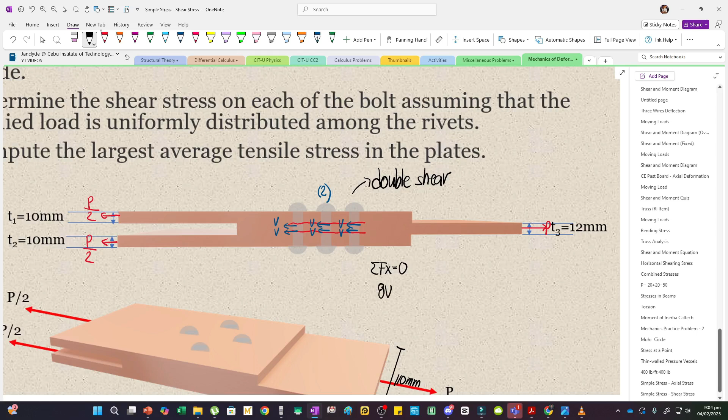Therefore, the shear force is equal to P divided by 8. Computing the shear stress, the diameter of each rivet is 20 mm. So this is now P over 8, our shear force, divided by pi over 4 multiplied by 20 squared. Or essentially, you can just use the force P. In our problem, P is equal to 20 kilonewtons times 1,000, and we have 8 shear areas, so multiply that by 8.

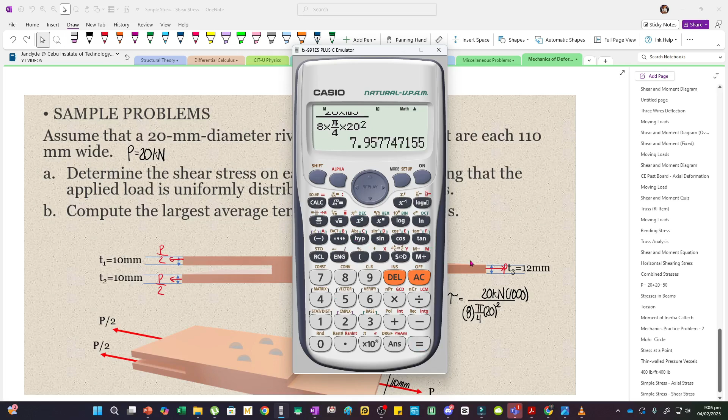Again, you can analyze it as this: the shear force is P over 8, or in essence you have 8 shear areas. So we input that, 20 E3, then divided by 8 times pi over 4 multiplied by 20 squared. So this is 7.96 MPa.

Now what if we remove the bottom plate? If we remove the bottom plate, this will just be subjected to single shear. So this shear area, just multiply it by 4, the number of bolts. Essentially, multiply the shear area by the number of bolts, and then if it's double shear, multiply it again by 2.

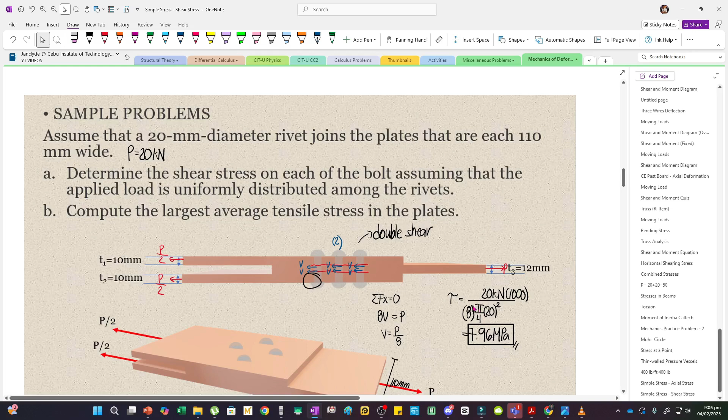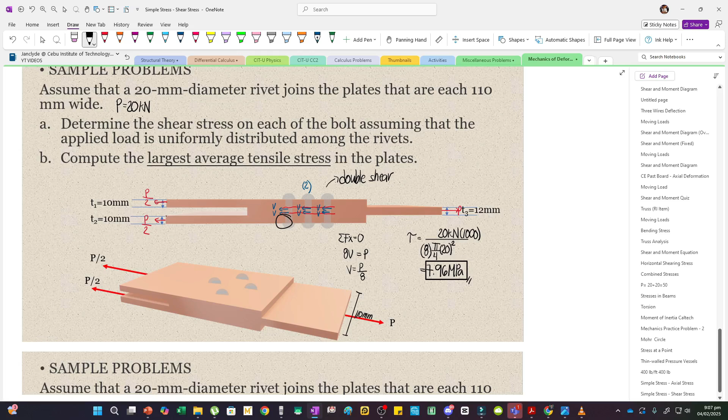Now for the second question, compute the largest average tensile stress in the plates. The plates, the middle plate has a different thickness from the top and bottom plate, so we need separate calculations. However, you should be careful here, what's being asked is the largest average tensile stress. Now, for tensile stress, we need the perpendicular area, perpendicular to the force.

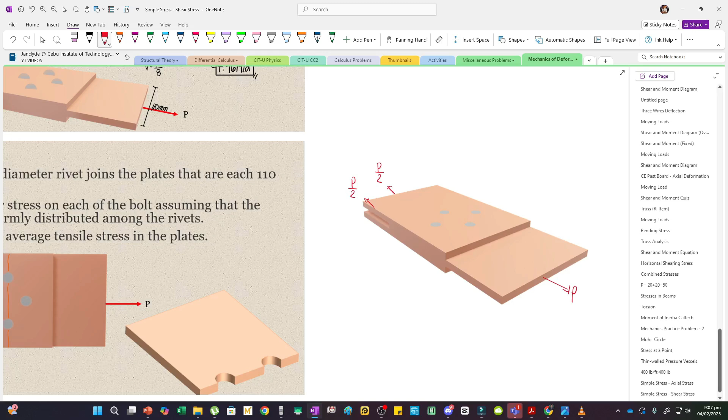So essentially, if this is our plate, this is the force we applied. And here too, you have P over 2 at the bottom. Notice this is the perpendicular area to our force. But the largest average tensile stress will not happen if this is the area we consider, since area is inversely proportional to stress. So as the area gets smaller, the stress gets larger.

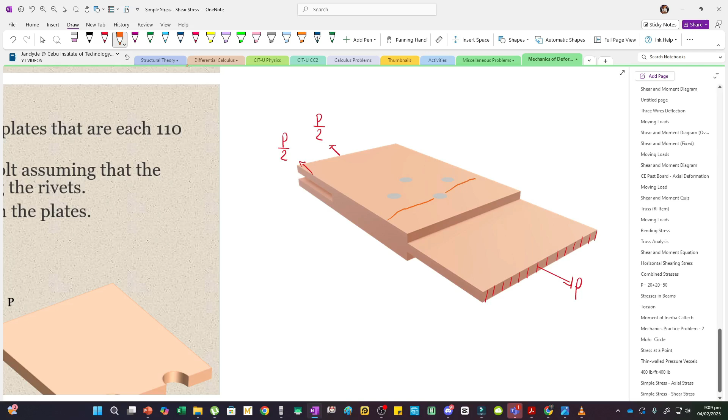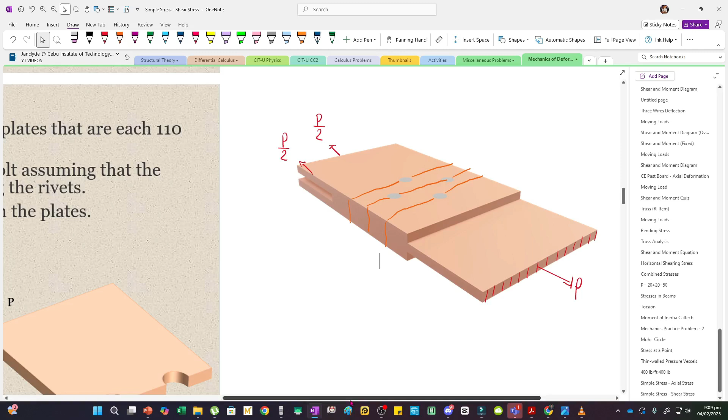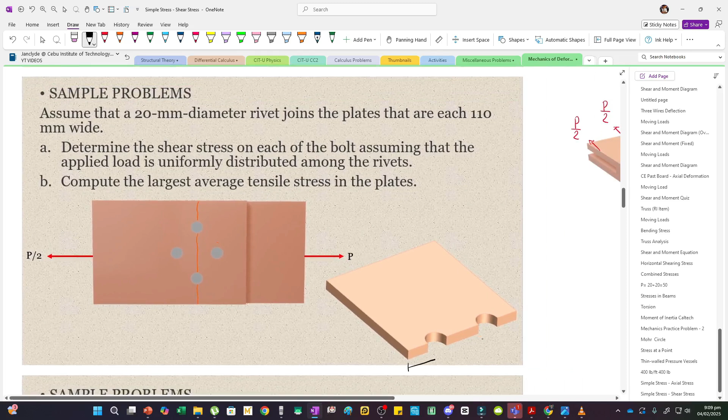So once we make this cutting plane, we cut it like that. But let's just consider one plate. This is the figure that results when we slice that. So again, just neglect this cut, it's not the smallest area. So we know that this is 110 mm, but we have to subtract two holes from that.

I hope we agree that this will just be our tensile area: this one plus this one, plus this one. And this distance is just the diameter of the bolt. But that's for steel design purposes. In mechanics, once you're in steel design, there's already an allowance given for the bolt hole, so the calculation changes a bit. But since we're still in mechanics, let's just assume that distance is equal to the diameter of the bolt, which is 20 mm.

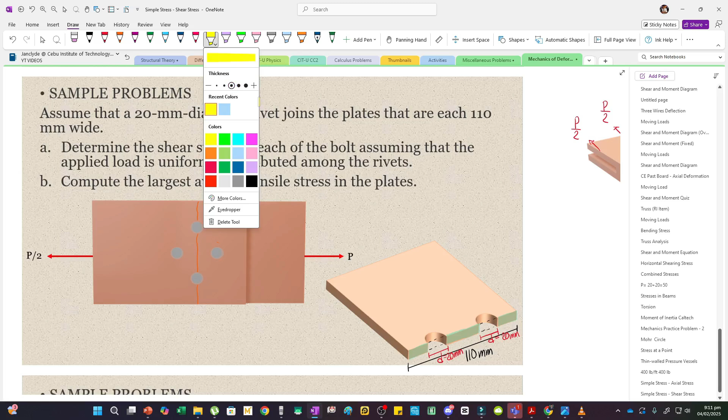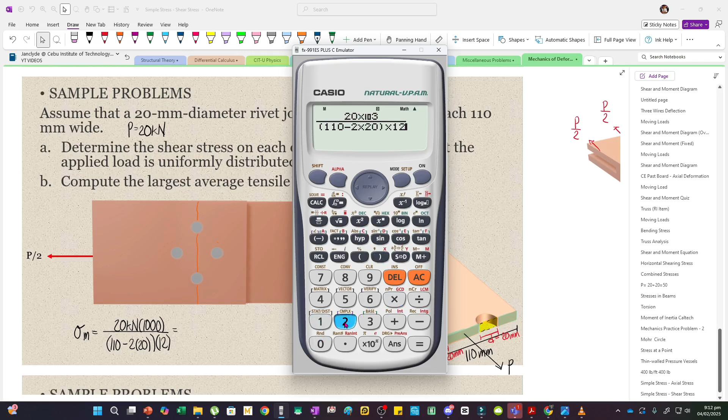So for the largest average tensile stress, again this is our force P. When we transmit it, P is equal to 20 kilonewtons. So the largest average tensile stress for the middle plate is equal to 20 kilonewtons times 1,000 to convert to newtons, then divided by the area. The area is 110, the width, minus two times 20 mm, since two holes are passed through, then multiplied by the thickness. The thickness of the middle plate is 12 mm. So for the middle plate, this is 20,000 divided by (110 minus two times 20) multiplied by 12, which gives 23.81 MPa.

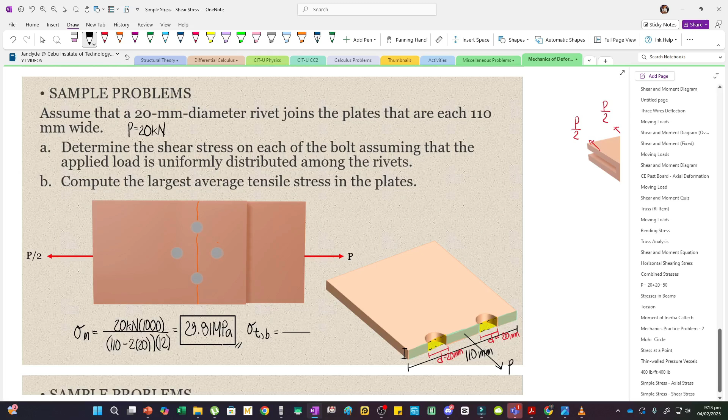Now for the top and bottom plate, same calculation, just with T and B for top and bottom. But the force carried by the top and bottom plate is only P over 2. So essentially, 20 kilonewtons divided by 2, times 1,000 to convert to newtons. And our area is 110 minus two times 20, but instead of 12, the thickness of the top and bottom plate is only 10 mm. So times 10, the stress would be... this is 14.29.

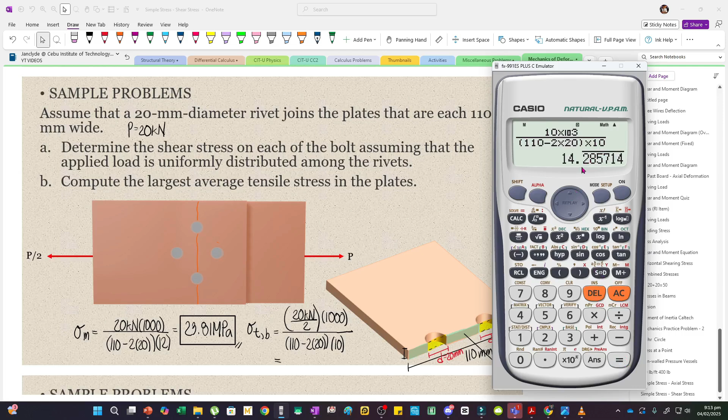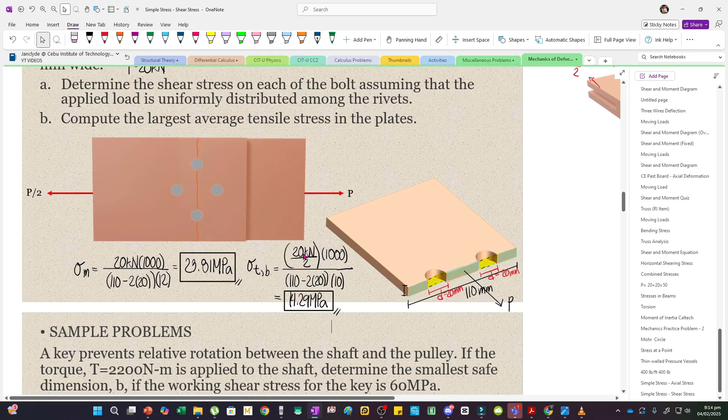Notice that even though the middle plate has a larger thickness, it still has a larger stress, since it is subjected to the full force of P, while the top and bottom plate is only subjected to half of P. So that's why in butt connections, as we call them, usually only the middle plate is considered in the design. That's what governs.